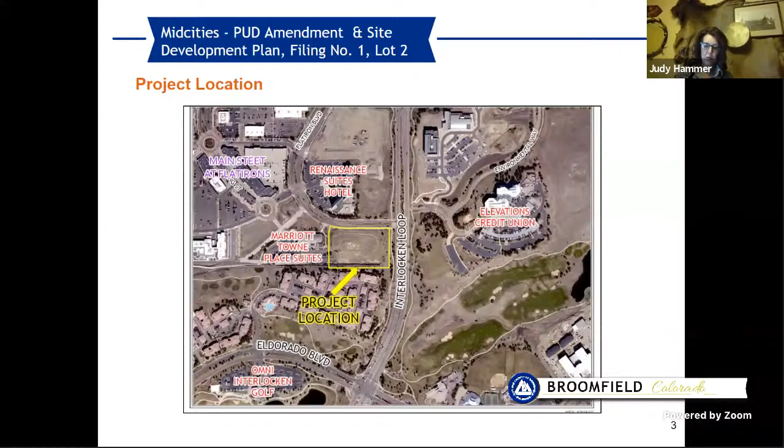The property is located at 460 Flatiron Boulevard at the southwest intersection of Interlocken Loop and Flatiron Boulevard, identified as Tract 6 per the Mid-Cities PUD. The Town Place Suites by Marriott is immediately to the west, and Camden Interlocken Apartments are to the south. One of the two lots to the north of the site is undeveloped, while the second has a hotel. The property to the northwest of the Town Place Suites lot is approved for a hotel which may be built in the future. Next slide please.

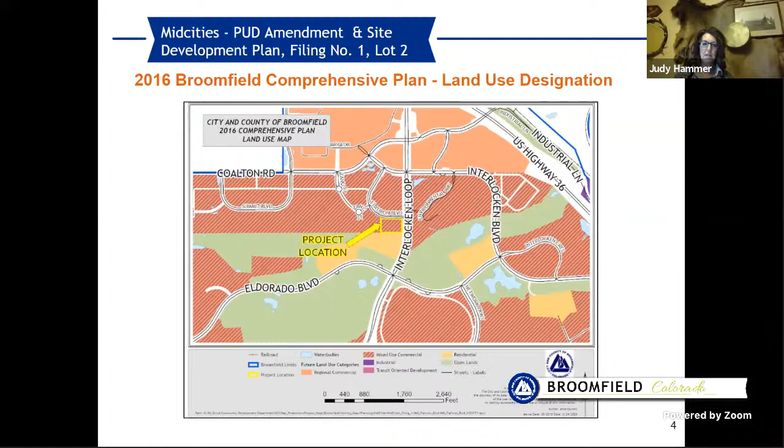The land use designation for the site is mixed use commercial. The proposed multifamily residential use, when taken into consideration with the surrounding uses, is consistent with the intended mixed use commercial designation. Next slide please.

The site development plan captures a 5-story Class A 254-unit apartment complex that wraps around a 5-story parking garage with 423 parking spaces and 20 bicycle spaces interspersed on each floor. Amenities include a sky lounge, fitness center, club room, pool courtyard, and a dog park and dog wash.

The buildings are oriented to maximize frontage along the public roadways, providing for an upscale urban feel. The amenity space is located at the primary access at the northern elevation, with an elevated architecturally interesting corner entrance at the Interlocken and Flatiron intersection.

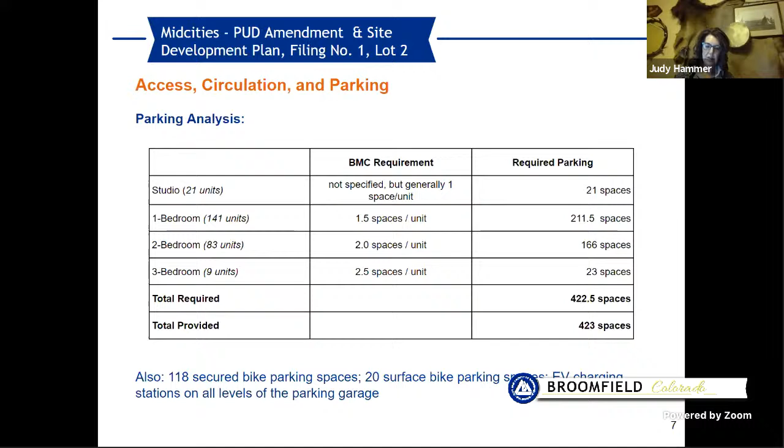The following slides show the architecture of the building.

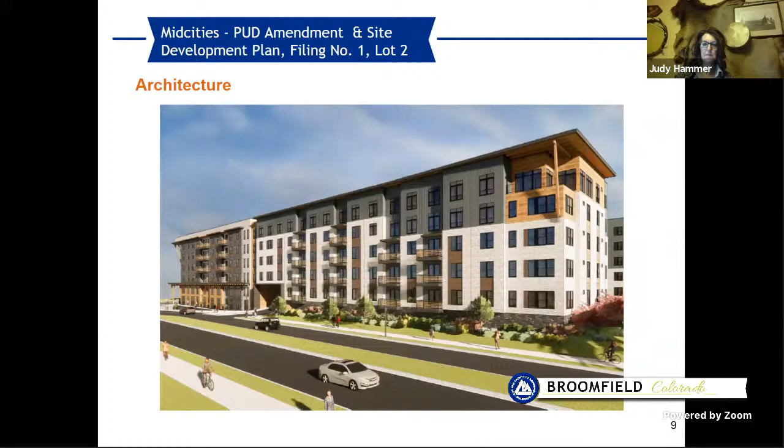The next slide shows views looking southeast along the Flatiron Boulevard intersection. You can see the entrance there, the right out entrance, just a little bit to the left of the screen.

Landscaping is concentrated around the perimeter of the complex, up next to the building, and within the pool courtyard with shade trees in the dog park, and along the park island that is between the shared drive on the left side of the screen. There is limited landscaping at the northeast corner due to a FRICO-held easement that precludes plantings with deep root systems.

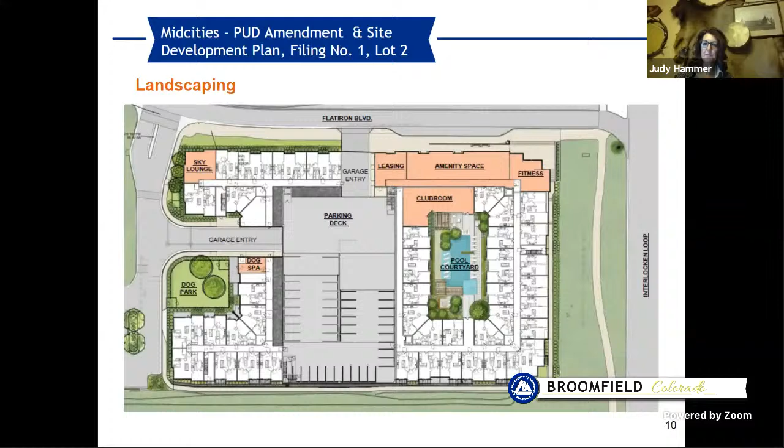Outdoor furniture will be placed around the pool courtyard, as you can see by this rendering.

The project will include a monument sign at the corner entrance. It's kind of built into the stairs. Signs will be reviewed as a separate sign permit application to be consistent with the Broomfield municipal code requirements and the PUD plan design criteria for all signage to be compatible with building architecture.

The applicant is providing $817,364 in cash in lieu based on a PLD obligation for 11.66 acres. The 254 unit apartment complex is expected to generate 486 persons at build out.

The applicant is also providing a full cash in lieu payment of $1,468,800 for the development meeting the inclusionary housing ordinance requirements. The Housing Advisory Committee has agreed to this proposal by the developer.

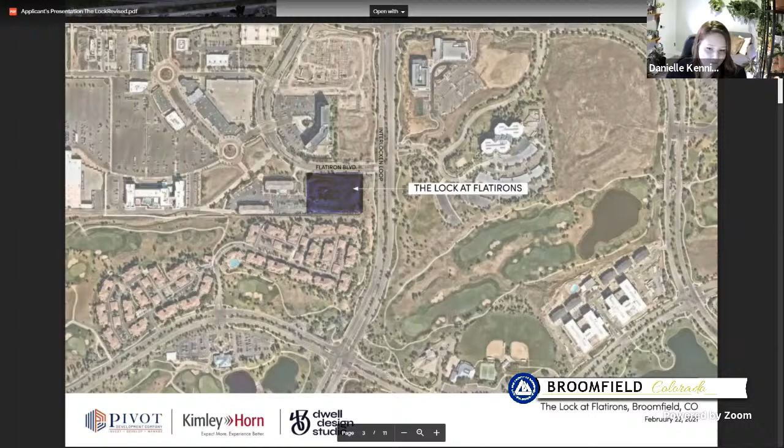The color scheme deals with just a few different warm tones that contrast and allow us to provide different massing in the building, so the monolithic size doesn't seem so overwhelming, and really ground the facade.

If you could go to the next slide.

This is our kind of moment statement, looking from Flatiron Boulevard into Interlocken Loop when you turn into the project. It's going to be the main thing we see. You'll notice, compared to the previous slide, that this elevation is a little bit different.

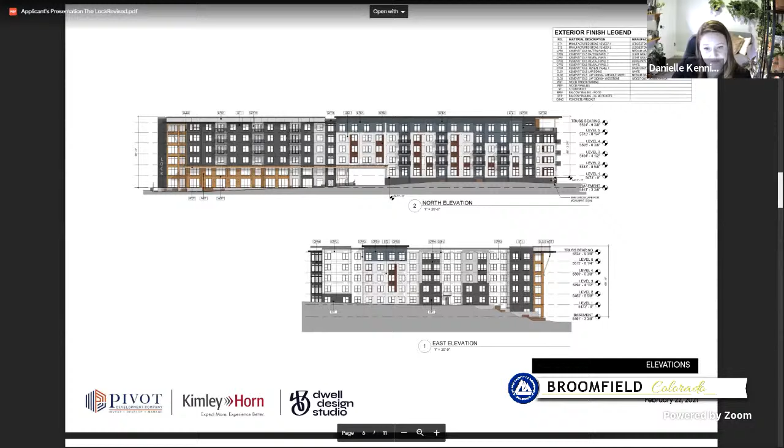If you take a look at the left portion of the site, that's facing west. We've catered the building shape to optimize the views towards the mountains and get the most for our money there.

From an amenity standpoint, on the first floor we've got the dog spa and bike storage right at the entrance to the garage. Inside the garage, we have more bike parking, as Matt mentioned, along with ski storage.

On the northwest corner, we have the Sky Lounge on the 5th floor that gives panoramic views of the city and the mountains, which is probably one of my favorite parts of the project, personally.

Going down the facade on the north portion, we've got a lot of different amenity spaces stacking there—a 2-story fitness volume, and a club room that feeds into the pool courtyard, giving an indoor-outdoor feel that we think residents will really appreciate, being able to spend so much time in such an amazing pool courtyard.

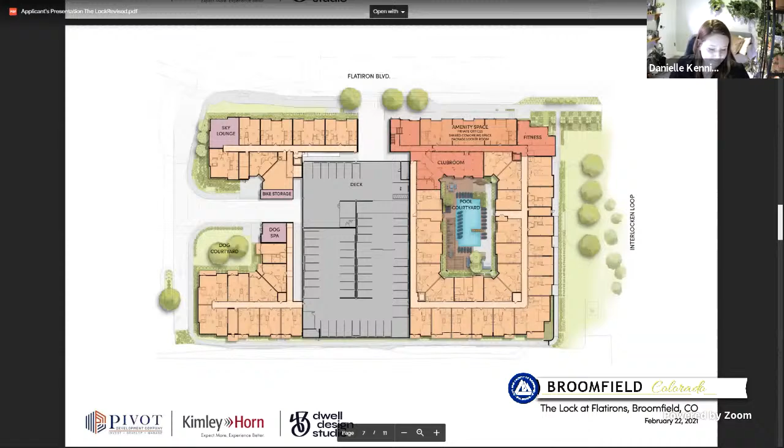If you could go to the next slide, I think it would be best for Chris to discuss the elements he developed on this portion.

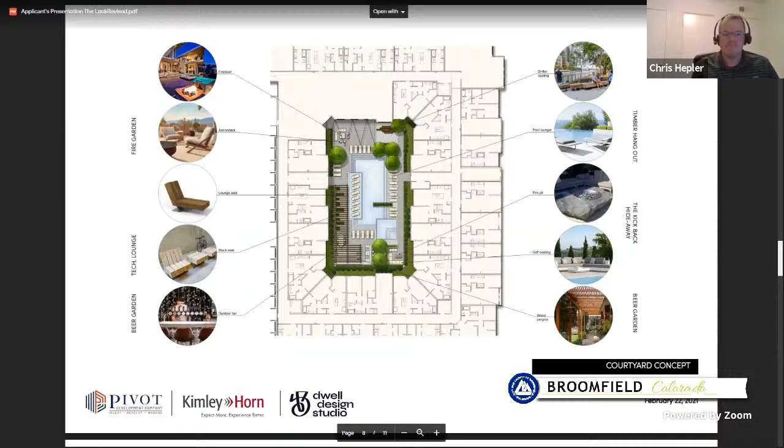And then I'll pass it over to Canaan for some zoning items. Thanks, Chris—you can go ahead and progress to the next slide.

One of the variance requests that Judy had mentioned was our dimensions of our parking garage, and this was one that we spent a lot of time working with Broomfield City staff on. The proposal we've come up with is to shorten the parking stalls from 19 feet to 18 feet, and shrink down the drive aisle from 25 feet to roughly 24 and a half feet. This is consistent with parking garages we've constructed across the country, and one that we worked with city staff to confirm these dimensions worked via truck turning analyses and various other methods.

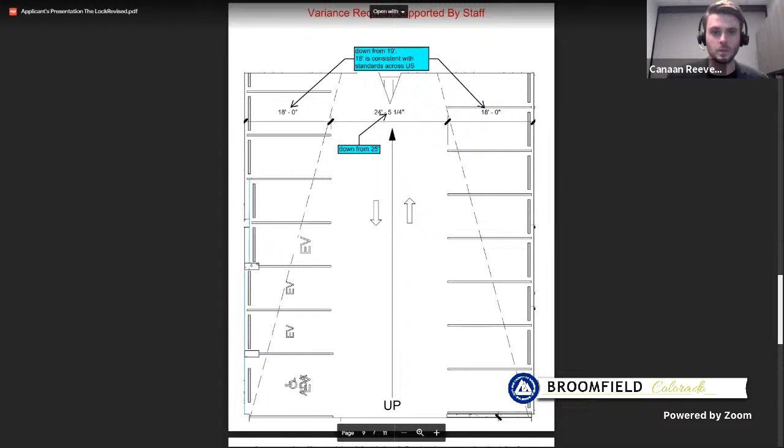If you go to the next slide, it should demonstrate the approach that we wanted to vary from. The current Broomfield Municipal Code allows for a large number of compact stalls within a parking garage, or really any parking lot for that matter. Those compact stalls are at a 15-foot depth. So the alternative to what we arrived at would have been 15 feet to the 26-foot to the 19-foot, and I realize there's some play there in the dimensions probably in the middle.

But what we didn't want to do was implement 161 of these compact spaces inside a parking garage, especially knowing that you've got vehicles in Colorado that are meant for fun - sport utility vehicles and ones that are quite large. So we thought a more practical approach was to adjust those parking stalls down to 18 feet, and had some great conversations with Tom Schomer about right sizing this parking garage and the parking spaces. Just wanted to highlight that as the reason behind it. We could have gone in without a variance request, but felt the variance request was better for the city and better for our residents. So that would be the first variance I'd touch on.

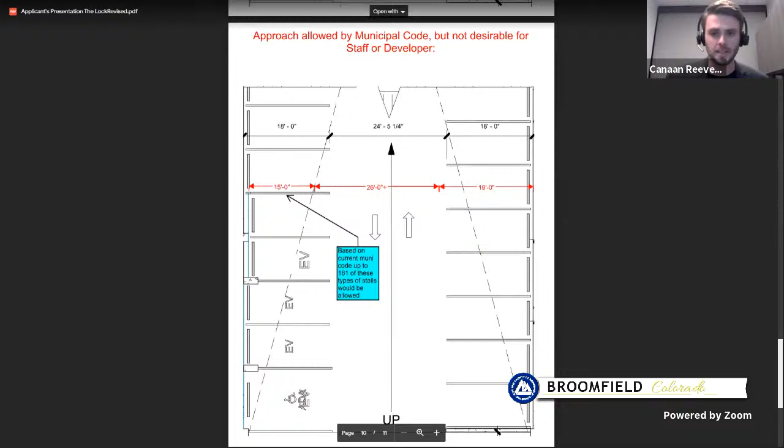You can move forward with the slide, please.

The second one I wanted to highlight was the open space requirement. Right now we sit above 25% for our open space, 25% being the open space requirement for the PUD zoning that has previously been established. But as Judy mentioned, 40% is what we typically see for residential properties in Broomfield, as stated by the Broomfield Municipal Code. And what I wanted to highlight specifically on this sheet is that the property line for this specific project is actually interesting.

It's on the left side of that dark green rectangle that I've drawn here. So the amount of open space we're able to count is limited by where the property line is, but there's actually a very substantial amount of frontage within that green rectangle on the east side of our property, with the outside of the green rectangle being where your curb line is. That also contributes to the open space.

That said, we also wanted to maximize the open space elsewhere. We know open space is a really important element in Interlocken and to the city and county of Broomfield, which is why we've added things like the dog courtyard and tried to add some nice plantings in that northeast corner that Danielle had highlighted. So there are other areas as well that we really wanted to focus on, making sure the presence of Broomfield and Interlocken is maintained with this site.

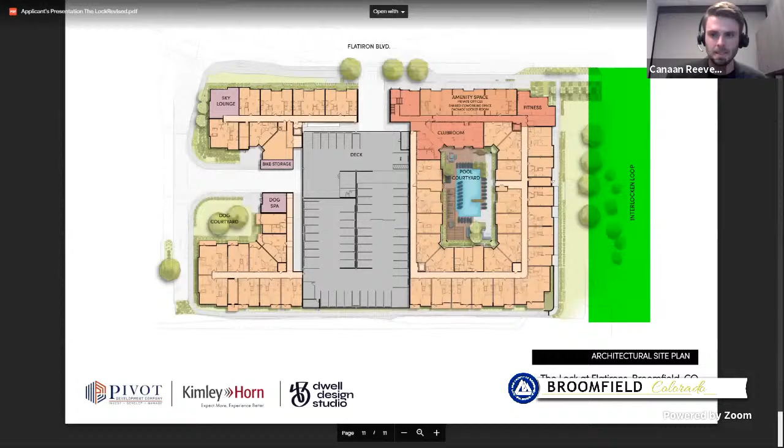Judy, were those in the link provided to Jake and IT? Yeah, I combined them all into one PDF and changed the link. Perhaps I did not do it right.

Yeah, Judy, this is Jake. I used the link from the checklist that was sent out, and it just has the 11 slides. Yeah, and I've changed it today to add those other slides. So should I change the link, Jake, so he can put those up? We can either do that, or if the applicant has them readily available, they could share their screen as well. That might be a little faster if they have them.

Canaan, do you have those? Yep, I have those available if you're willing to let me share my screen for just a brief moment. Yeah, you should have permissions to do so. You can go ahead. Okay, thank you. Let me do that right now.

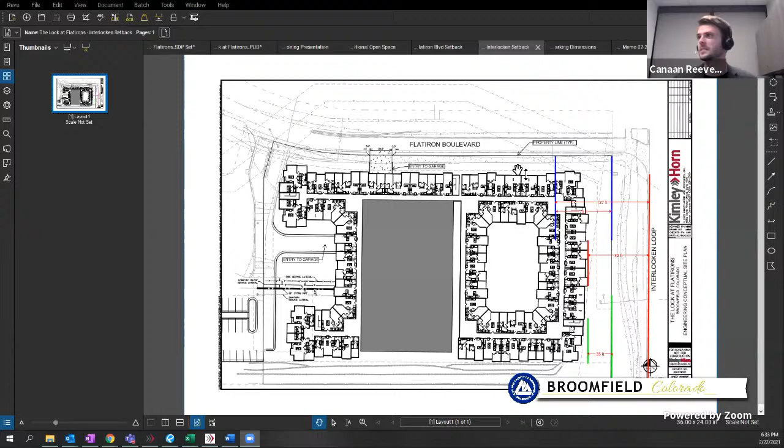Screen. Is that presenting properly? It's a drawing. It looks good. A site plan. Well, very good. That's what I'm trying to share with you.

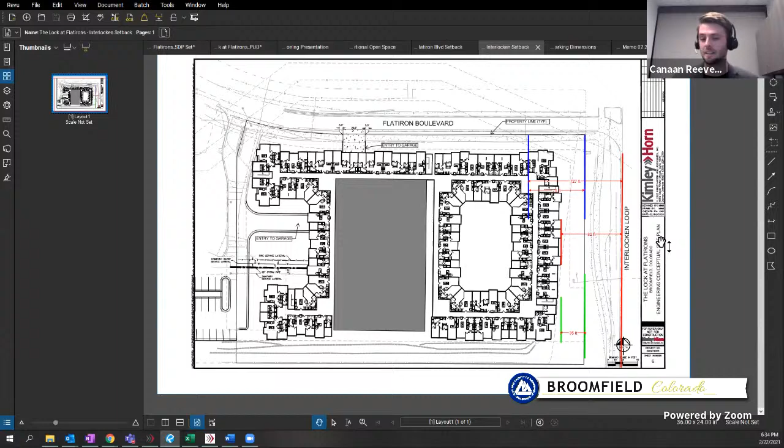Thank you so much. So one of the other variances that Judy shared today was that we were looking to reduce the setback off of Interlocken Loop, and this was a very similar exhibit to what we had shared with our concept plan. The one thing I wanted to highlight, if it wasn't clear in my open space drawing, is that the curb is way out here, and so you've got this very healthy distance between the building face and our curb — the property line doesn't start until about midway through there. And so a current 75-foot setback would push the building setback to be something like this, which would in total be 127 feet off of the back of the curb. So that created some challenges in terms of getting the right size of this building.

However, we wanted to make sure that we were aligned with the intent of that setback. And so our actual building placement still remains 82 feet off the back of the curb, although the variance results in a 35-foot setback adjustment. So we wanted to make sure that we didn't go overboard and bring this building right up next to the sidewalk or the curb. We know that this particular trail is an important one in Interlocken, and so a healthy distance here, 82 feet, we felt was still consistent with the intent of that setback. So that was one variance.

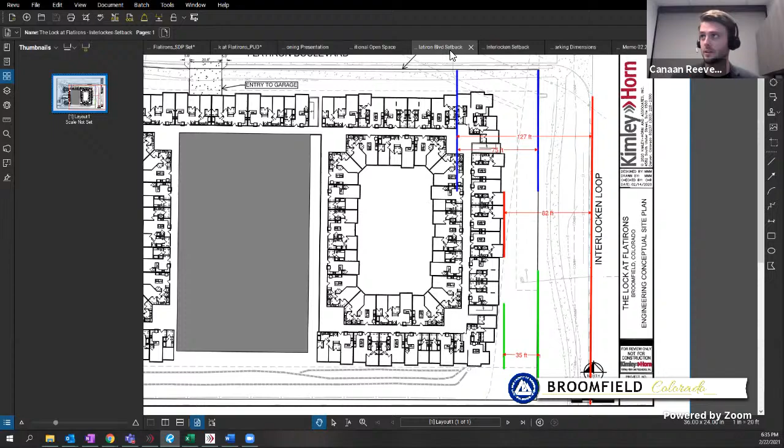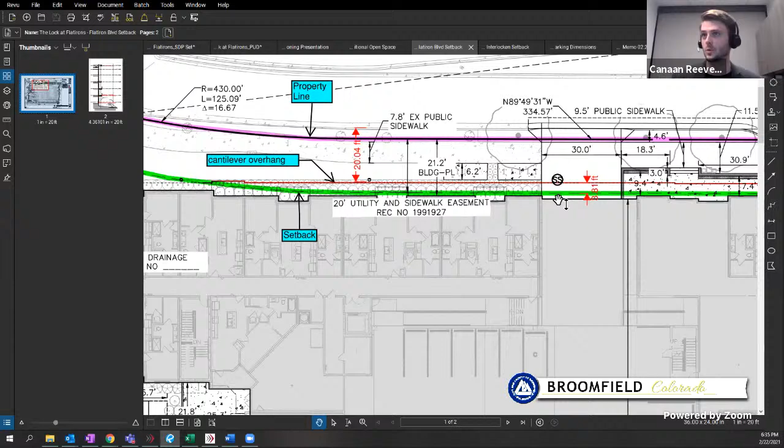And then the final item I'll touch on briefly is the encroachment to the 20-foot setback on the north side. I use encroachment because we're not looking to alter the setbacks. We think the 20-foot setback largely across the face of this building was an important thing to hold, but there are certain cantilever elements that overhang the actual setback. You can really see this in section view right here, where you've got 20 feet from the back of the curb. We've maintained a similar arrangement with Flatiron Boulevard, where we wanted to maintain the intent of the setback — 20 feet from the building to our curb — but the actual encroachment, this little yellow portion and the roof we've considered, jumps in just a few feet. I think the max extent of that was 4.2 feet or so.

This was another item we worked very closely with the Architectural Control Committee on, knowing that we wanted this space to feel right. We wanted this building to be positioned correctly. And we were able to get the ACC's approval on this, and they were pleased, I think, with the urban character while still maintaining the suburban elements that we know make up Broomfield.

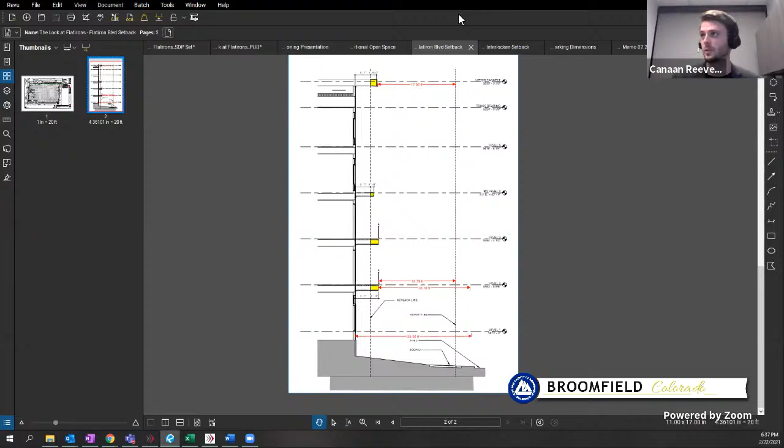So those were the four variance items that I wanted to touch on, just so you had some additional context and clarity. I'm happy to reference these if we get into further discussion, but I think at this moment that concludes our presentation, Matt, unless you have any other things you wanted to close in before we turn it over to planning and zoning.

Other than that, it's been a pleasure so far working with everyone. We're really excited about this project and being part of Broomfield, bringing new residents to Broomfield and existing residents to our project. If there are questions or what have you, myself and my team are open to listen and answer any of them you may have.

Okay, thank you. I know we will have many questions from the commissioners. So does that conclude your presentation? Yes, sir. Yeah, very nice.

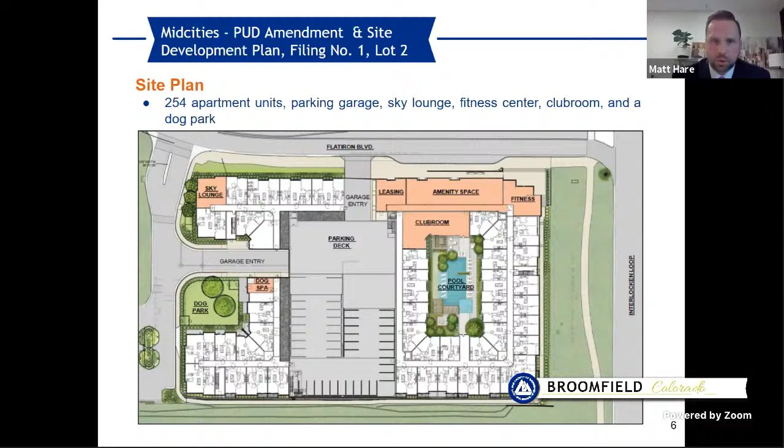It all depends on the budget of the project. To be frank with you, as I mentioned, we've worked with the HAC and made the commitment to do the cash in lieu for that. We're investigating the solar to be on much of the roof of the building other than the garage. I can't sit here and say I fully commit to it. I could tell you that we've been investigating it as a team for 6 months, and we continue to move forward with the idea that we are going to do that.

That is obviously the last portion of the building that will ever be constructed, because in doing the solar, the way the building will be constructed, the east side of the building is built first after the garage, then the west side. For the entire solar system to work well, it all has to be installed at one time. We definitely have had plans to do it. As I mentioned in our concept review, we are leaning towards being able to do that for sustainability. We have electronic systems throughout the building, we have EV stations within the garage. So we're definitely still trying to find a way to make that work, to be completely honest with you, Mr. Franz.

No, and thank you. I know you're doing a lot for sustainability, I just thought that was an important part of it, and so I just hope that happens. I definitely hear you. Thank you. No problem, thank you, appreciate your comments.